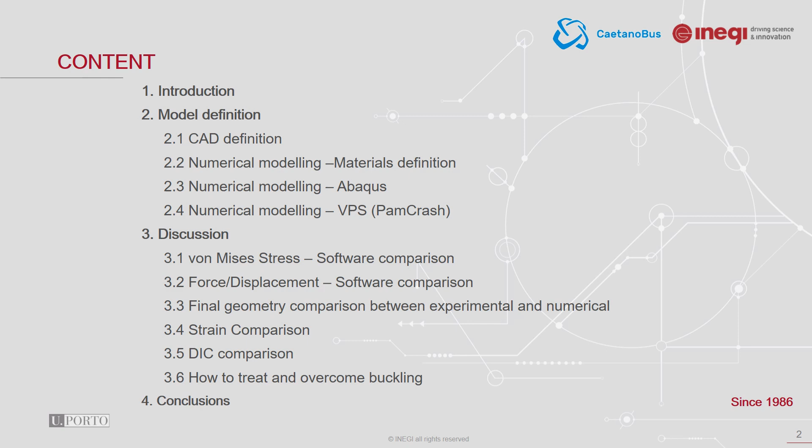Nowadays, testing automotive structures is a crucial moment of new systems in order to pre-validate a structure. There are few regulations to validate heavy vehicles subjected to front impact, and in this work we will evaluate a coach and its safety. In order to proceed, an adoption of R29 regulation is followed, despite R29 being a regulation indicated for trucks.

This study will start with the door system, where the experimental part is a pseudodynamic process that is presented in another presentation in the same congress. In this presentation, a numerical part is developed, then a comparison will be made. The R29 regulation says that a pendulum of no more than 1,500 kg must impact the front of the vehicle at 55 kJ of energy. Although it was assumed in the experimental part only 3% of the energy of the pendulum would be absorbed by the door.

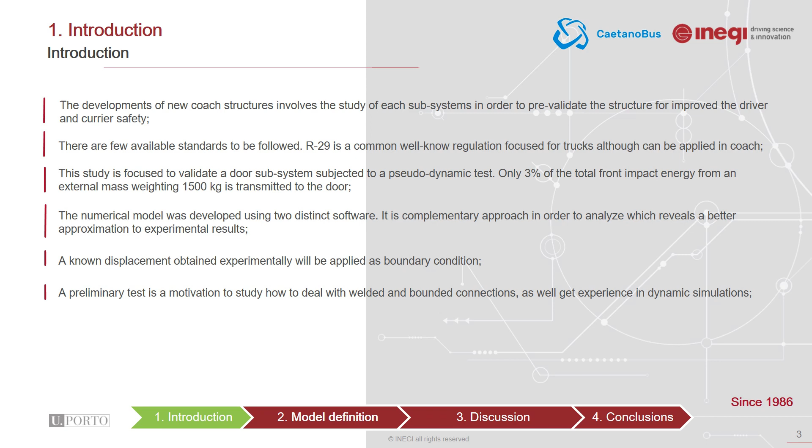The numerical models include results from Abaqus and PAM-Crash software. Then, one of them is chosen to carry on the study. A node displacement from the experimental part is applied as a boundary condition. This test represents an investment to study the structure and how to deal with welded and bonded connections, since in the physical part there were welded connections and adhesive connections that connect the main panel to the main frame.

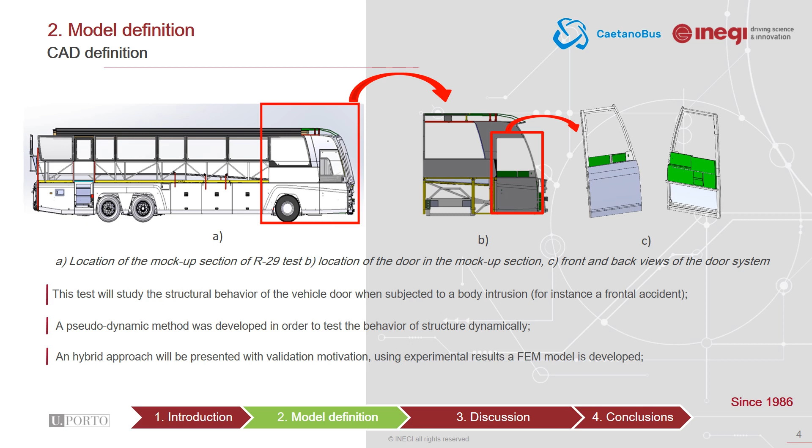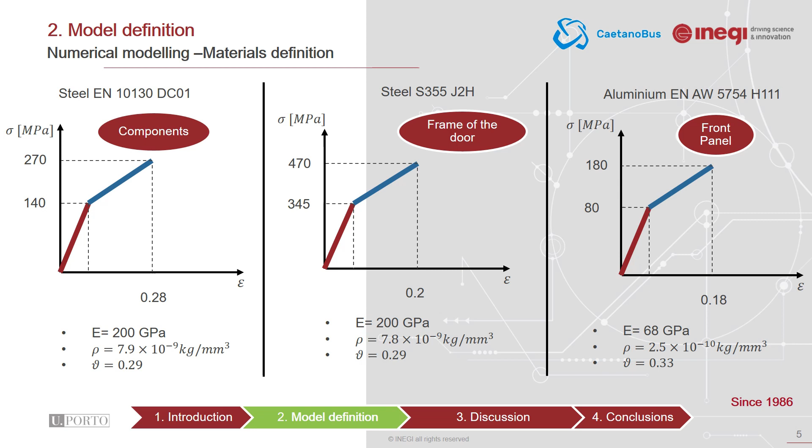Regarding the numerical model, there was an opportunity to introduce PAM-Crash in the project, so it would be interesting to have results from both softwares. Then a comparison between both softwares will be made. The FEM model started with Abaqus, where the mid-surface and the center line were assigned. This process was made in order to use shell elements and beam elements.

These structures have two types of connections, the adhesive connection between the structure and the front panel, and the welded connection between all the other parts. This is almost a rigid structure. Since there was no rupture or welding cracks in the experimental test, this was modeled as a tie constraint, constraining every degree of freedom.

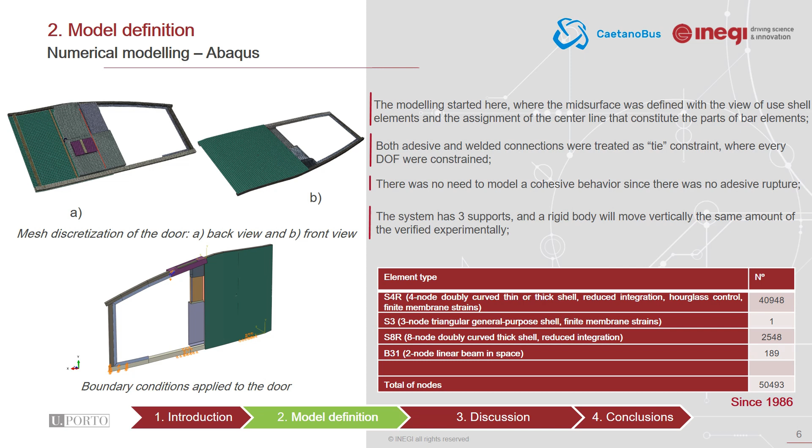Regarding the boundary conditions, there was an effort to be as similar as possible to the experimental test. In addition, you can consult in the table shown in this slide the element type and the number of nodes that were used in this simulation.

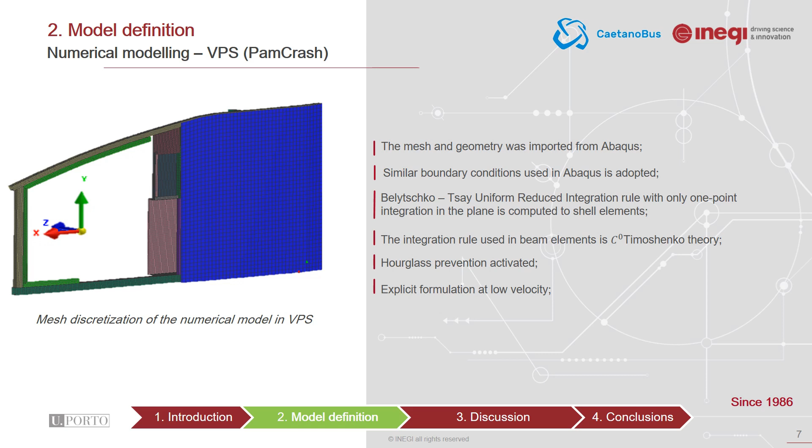Regarding PAM-Crash software, since we already had the structure meshed, this mesh was imported into PAM-Crash from Abaqus in order to take advantage of the work that was already done. The boundary conditions applied were similar to Abaqus. Regarding the integration rule, in the case of shell elements, Belytschko's uniform reduced integration was adopted, and Timoshenko theory was adopted for beam elements. Explicit formulation at low velocity is adopted, and hourglass prevention is activated.

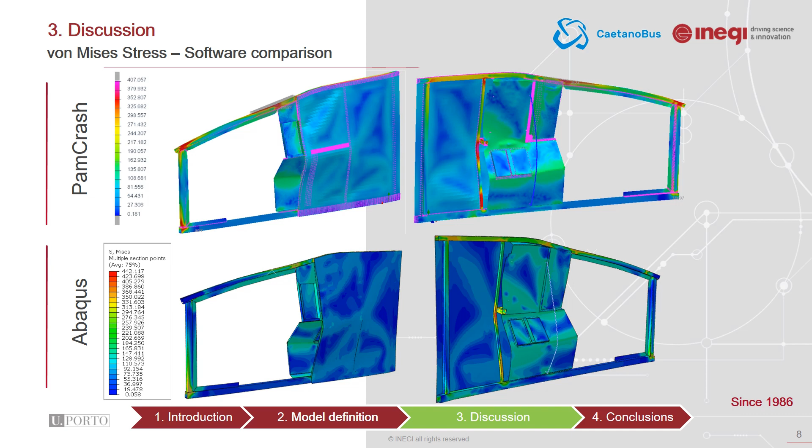The contour field is quite similar as you can see, although the maximum stress obtained via Abaqus is higher, 35 megapascal than PAM-Crash. The final geometry is quite close, even the side where the buckling happens, in the mid-zone. A deeper comparison will be made in the next slide in order to choose one software to proceed the study.

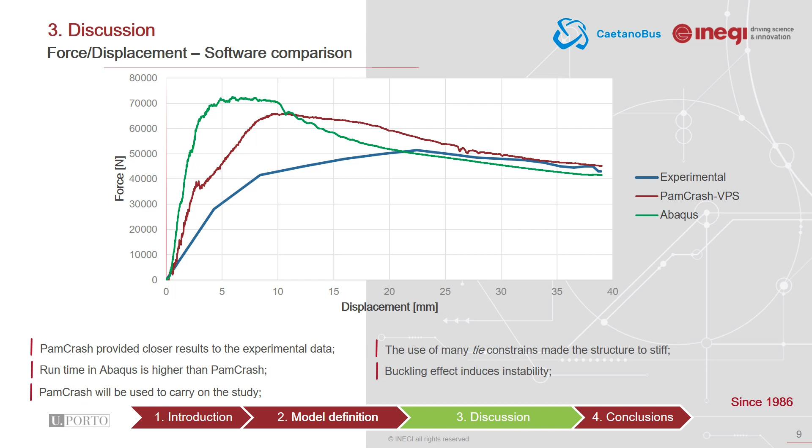In fact, the simplification of the connections using ties could lead to a stiffer structure than the real structure. Another point in the numerical simulation is the buckling effect that induces higher instability, which can result in a challenge to overcome such problem. In order to proceed this work, due to the advantage of PamCrash, this software is chosen to carry on the study.

So, in this slide is presented a direct comparison between the final geometry in the experimental test and the numerical simulation, either the front view and the back view. It is possible to notice that there is an excellent convergence of the final geometry. There is a good similarity between both results as we can see.

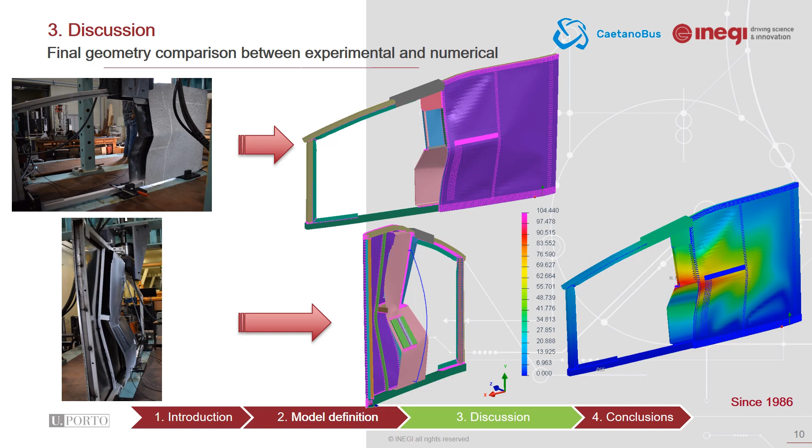Regarding the strain gauge results, there were placed 6 unidirectional strain gauges. 4 of them are placed in S355 alloy steels, to be more specific, N1, N4, N5 and N6. The other 2 are placed in DC01. These can be consulted with more detail in the other presentation. At the first sight, there is a low variation between the results. Note, the filled curves are the experimental, and the curves represented with points are the numerical.

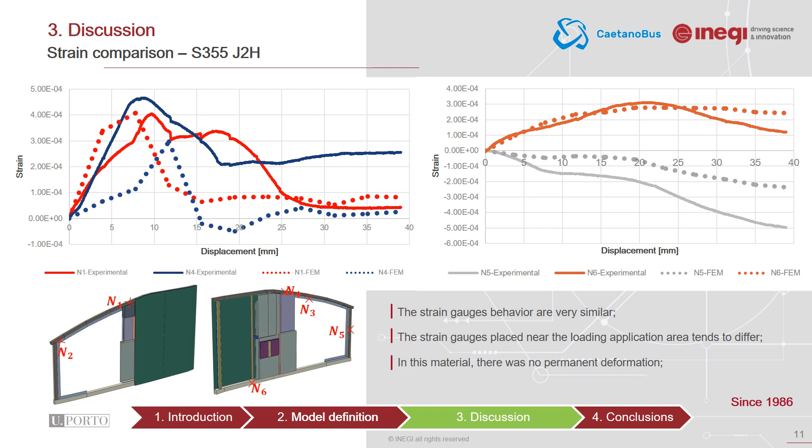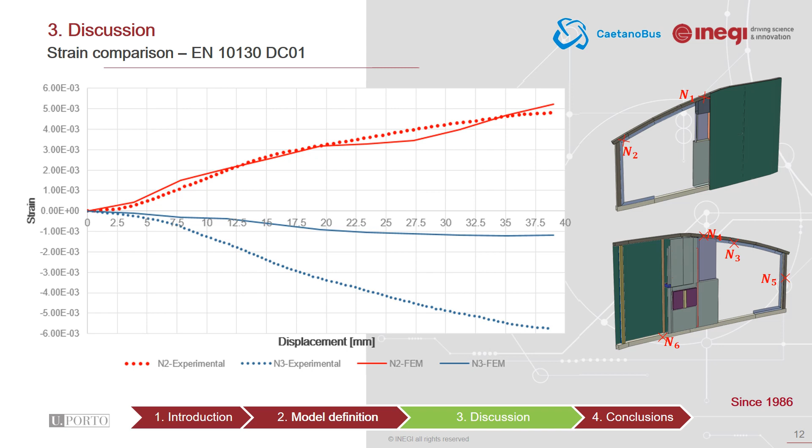Strain gauges placed near the loading area represent the ones which vary more. But if you look at the orange curve in the plot at your right, you can see there is a reasonable agreement between the experimental curve and the numerical curve. Please note all the strain gauges placed in this material did not suffer permanent deformation. Let's see the other 2 strain gauges placed in the other material. Again, N3 is placed quite near the loading area, so it tends to deviate more. The contrary behavior happens in N2, where there is a good relationship between the numerical curve and the experimental curve.

In the experimental test, 3D DIC was used to acquire full field data of displacement. Here we can compare both results, again remember using PamCrash. Please note the representation is in x, y and z, considering x the horizontal plane, y the vertical plane and z the perpendicular plane. In Y and Z, the agreement is reasonably good.

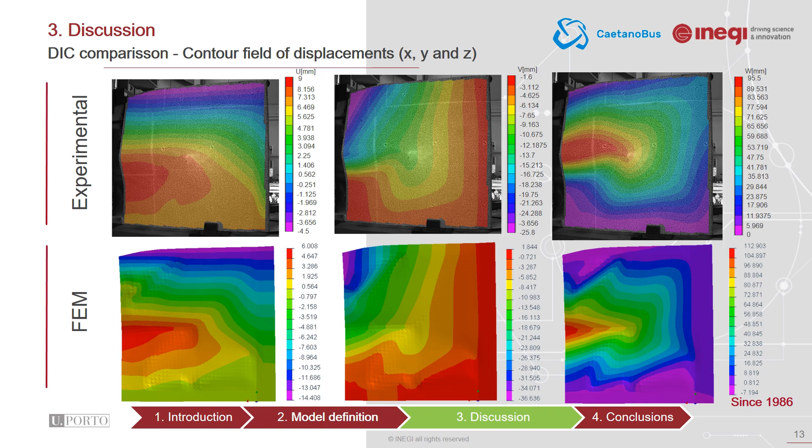In Z, the result in the experimental test comes out around 96 millimeters, while in the numerical test it comes out around 113 millimeters. On the other hand, in Y, the range in the experimental test starts at minus 26 millimeters and goes to minus 1.6 millimeters. In the numerical part, the range starts at minus 36 millimeters and finishes at 1.84 millimeters, so the deviation is quite low.

The last topic to be mentioned is buckling, how to overcome this problem. That was the main challenge in the numerical model. The solution to overcome this problem is the inclusion of imperfection in the perfect mesh. Depending on the imperfection rate, different buckling behaviors happen. So in order to achieve the best approximated result of the experimental curve, a trial and error should be made.

Testing different imperfection rates, different curves are obtained. As you can see, the green curve in the plot is the nearest to the experimental curve, but the geometry tends to be totally different. There is a need to adopt a middle term.

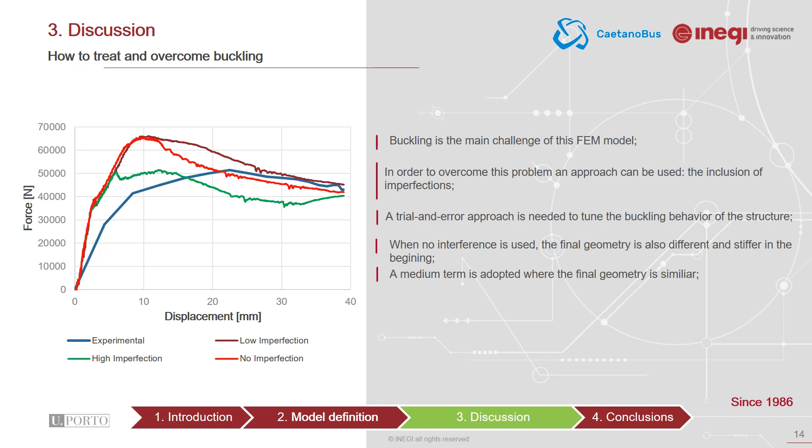In order to conclude this presentation, this work represents a preliminary test and an investment in automotive parts testing. A comparison with experimental data was possible, demonstrating a good agreement. Regarding the numerical simulation software, both provided good results, although PamCrash returned results with more accuracy.

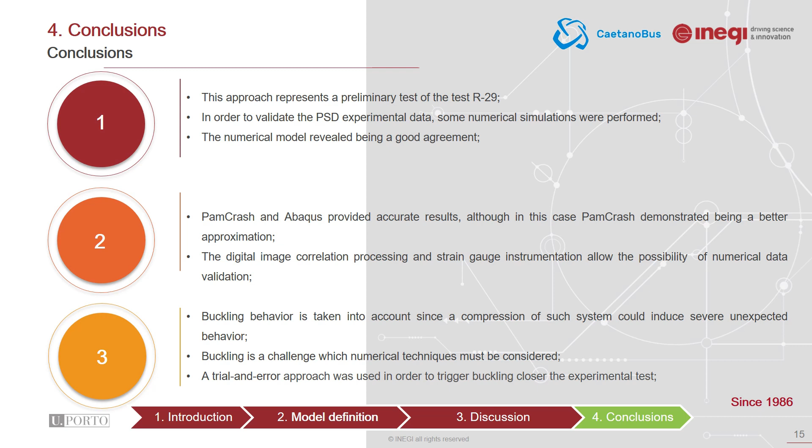Strain gauge instrumentation and DIC were implemented, allowing the possibility to have a direct comparison between the numerical model and the experimental model. To sum up, buckling was the main challenge of this structure. This behavior could induce severe and unexpected behaviors. Using numerical techniques and trial and error to trigger buckling, the closest match to the experimental test must be used.